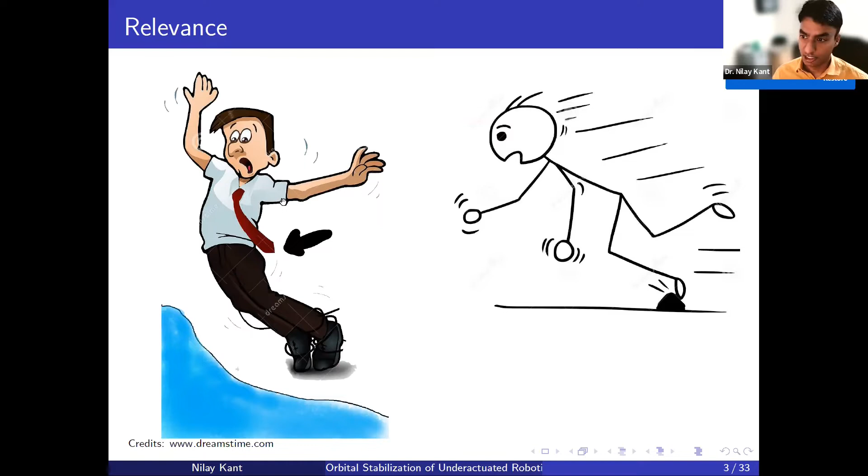You're not aware of a big stone put on the road, and you collide with that stone. Again, your body would try to avoid falling, and in this process it would apply large jerks on the joints so that you do not fall.

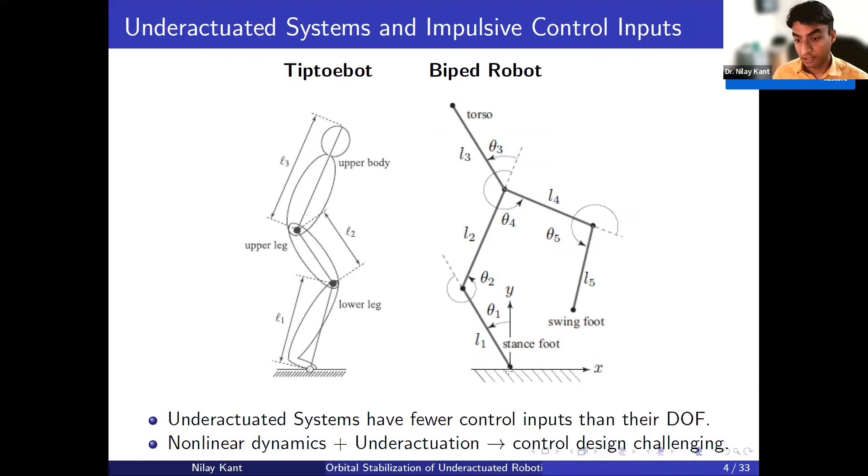For the example of a human standing or a Tiptoebot being stationary, it means that there is an equilibrium configuration. So if you see the upright equilibrium configuration of the Tiptoebot, and if you design a feedback controller to stabilize that equilibrium, it will have a region of attraction, which means that if the states of the Tiptoebot lie within this region, it would converge to the equilibrium.

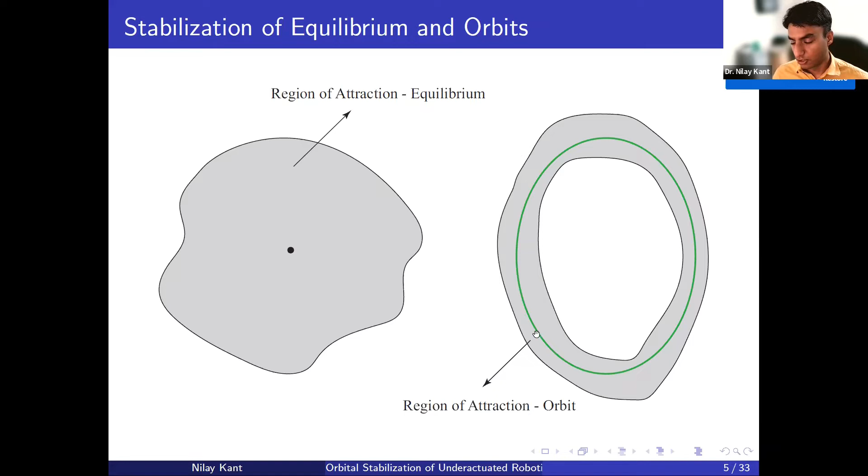Whereas for a biped robot, it's not a stationary configuration, it's a repetitive motion that we want to stabilize. Such motions are represented by an orbit. And similar to an equilibrium point, an orbit will have a region of attraction, which means that if you start within this region, you have a tendency to converge to this repetitive trajectory.

So these are some of the examples. On the left, again, orbit can represent a human walking gait, and an orbit can also represent a gymnast motion. For example, if you have seen gymnasts, they can swing their body and turn upside down. So there is a repetitive trajectory that they try to achieve, and you can represent that using orbits.

So in this particular work, we present a control strategy for orbital stabilization of underactuated systems, and we specifically use a combination of continuous and impulsive inputs.

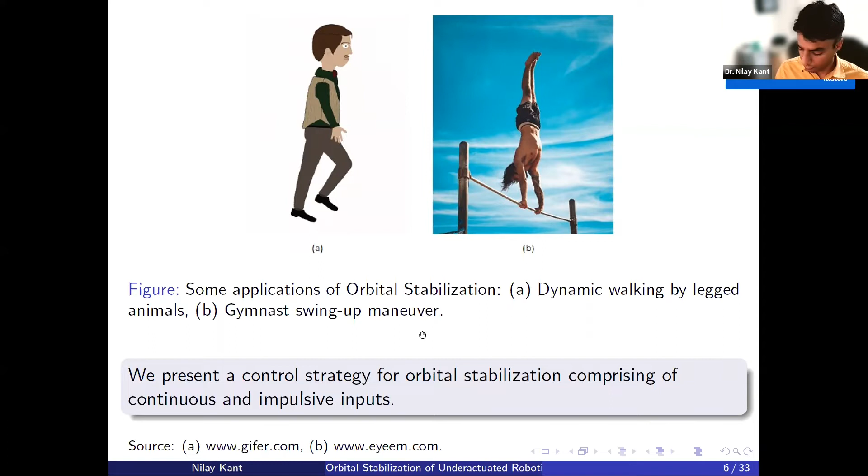So let's see what impulsive inputs are. If I throw a ball on a rigid ground, the ball has a tendency to collide and bounce back. Now, if you closely analyze the interaction of the ball with the ground, you'll see that when the ball makes contact with the ground, it immediately changes its velocity, but there is no change in position. And this is because a very large force acts during the time of collision.

Similarly, if you apply impulsive inputs on an underactuated system using motors or actuators, the joint's velocity would jump, but their position would not change. So that is what we are trying to see over here.

The equation of motion of an underactuated system can be represented in a simple form by this equation over here. You can note that here the control input is U, but the control input is 0 for Q2, which means that Q1 is actively controlled using control input U, but there is no control input to actively control Q2. So let's see what happens if U is impulsive in nature.

What we do is we integrate this equation on both sides for a very short interval of time. So the integral of U is the impulse of the force, right? And you can basically ignore these terms because they do not change in a very short interval of time.

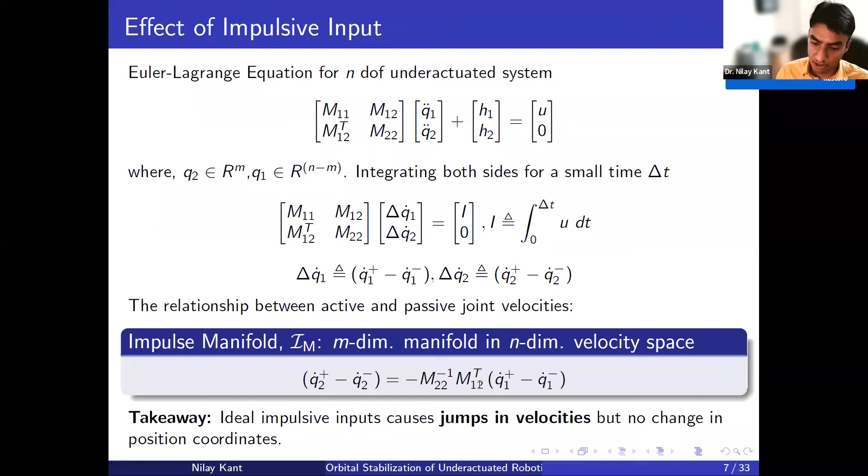So again, to summarize, if the active joint velocity jumps from q1 dot minus to q1 dot plus, the passive joint velocity would also jump, and they are related by this equation. So the takeaway is, if you apply ideal impulsive inputs, it would cause jumps in velocity, but there would be no change in position coordinates.

Now, with this background, we are ready to state our formal problem statement. So if you remember the gymnast problem, we are actually trying to stabilize the orbit for that gymnast. That's what we're trying to quantify here mathematically.

So we assume that we have an underactuated system with a single passive degree of freedom. So if there are n degrees of freedom, there are n minus 1 actively controlled joints and 1 passively controlled joint. Again, the generalized coordinates are denoted by Q1 and Q2, where Q1 is active and Q2 is passive.

So the control objective is to stabilize the orbit defined by this equation. What we want is Q1 to go to 0, Q1 dot to go to 0, and E to converge to E desired, which basically means that if you consider the gymnast problem, the body of the gymnast would remain stationary with respect to each other, but the entire body would oscillate at some desired energy.

That's what we're trying to achieve here. So the total mechanical energy of an underactuated system can be given by this expression, where the first term is the kinetic energy and the second term is the potential energy, and M is the mass matrix of the system.

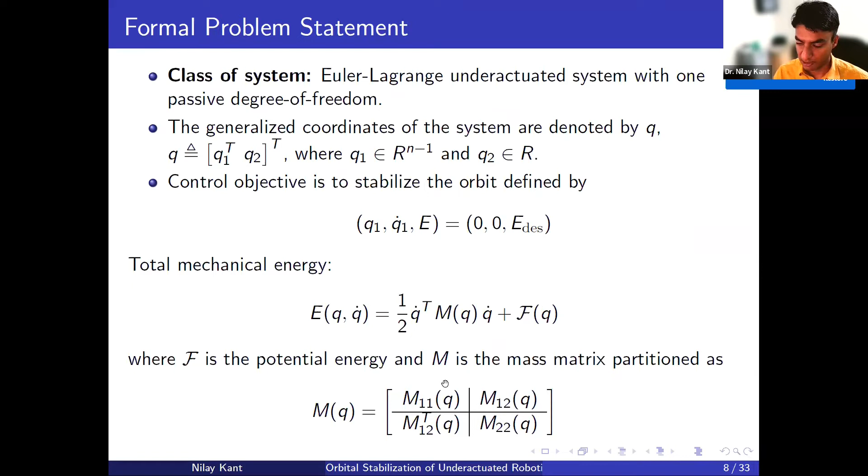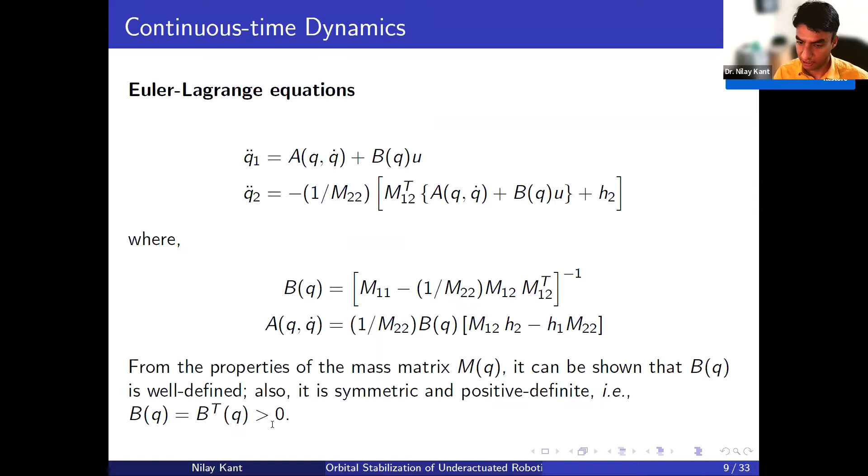So the Euler-Lagrange equation, as we saw earlier, can be expressed in this form, where the matrices B and A are given here. No need to go into the details, but a higher level overview would be good enough to understand. One thing to note here is this matrix B is positive definite. We'll be using this pretty soon.

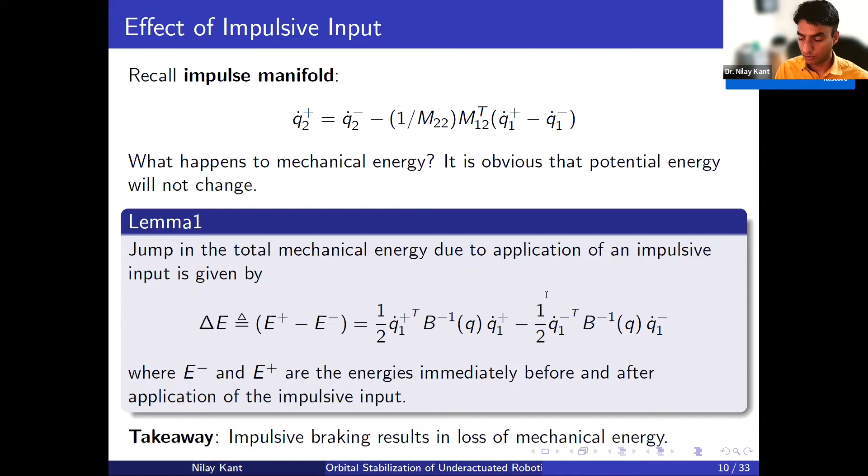Now, if you substitute Q1 dot plus to be 0 over here, you are left with this term. And if you recall, B is positive definite, which means that this entire term is negative. So what this means is whenever you apply an impulsive braking input, the overall energy of the system is lost. So we always lose energy whenever we apply impulsive braking.

Now, let us get back to our problem statement. If you recall, we wanted Q1 to go to 0, Q1 dot to go to 0, and E to converge to E desired. Now let us construct a scalar function given by this expression.

Note that this matrix Kp and Kd is positive definite, and the scalar Ke is positive. So this means that this entire term is positive definite. Now it means that whatever you substitute here, this quantity will either always be positive, or it will be 0 only when Q1 is 0, Q1 dot is 0, and E is equal to E desired.

So in other words, if we can somehow take the value of this function to 0, we have achieved our goal. So let's see what happens when we apply an impulsive braking and what happens to this function. You can show that if you choose this quantity to be positive, and if you apply an impulsive braking input, this quantity will always have a negative change. So you can always cause a decrease in this function's value when you apply an impulsive braking input.

So now this is the main idea of this work. We are trying to combine continuous time inputs as well as impulsive inputs. So what we intend to do is we want to design a continuous controller that can reduce V with time. In other words, V dot should be 0 or less than 0. But this cannot always be achieved because we have an underactuated system.

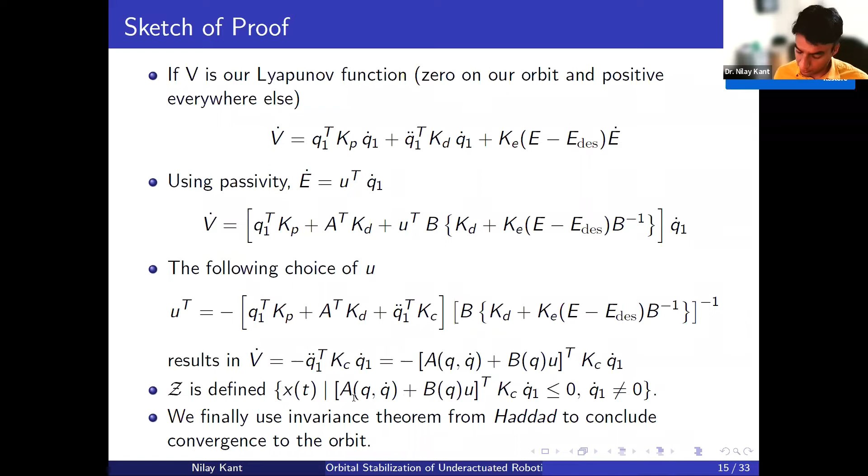If you remember the gymnast problem, you can model this gymnast as a three-link robot with 2 active degrees of freedom, which means that a gymnast can use his shoulder joints or his hip joints to add energy to the system, but he really doesn't have any control authority. That's why this joint is passive.

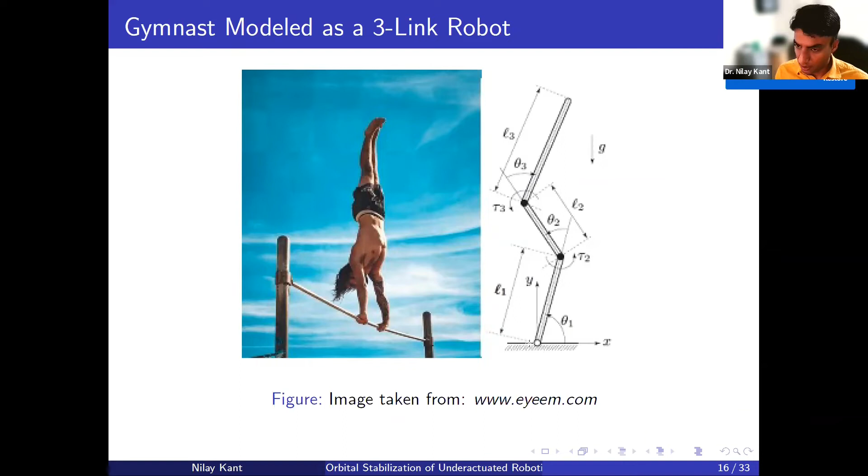Let me show you an experiment that we did.

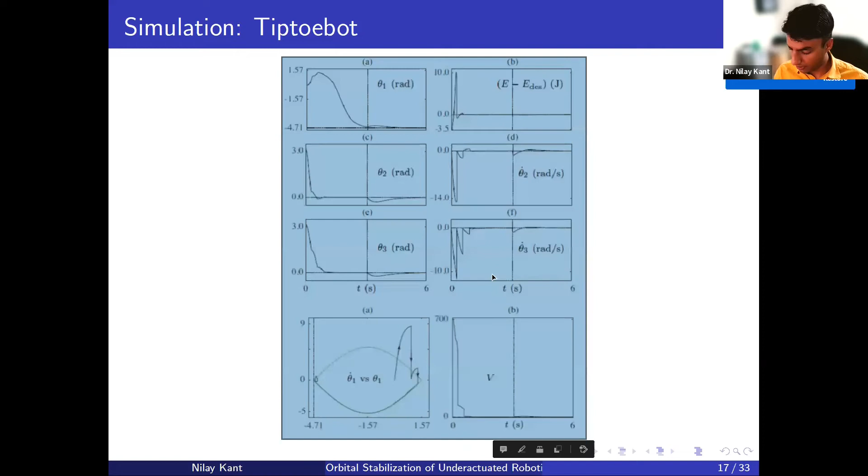On a rotary pendulum. So, do you see my screen? Go ahead, can you confirm? Yes, we can see it.

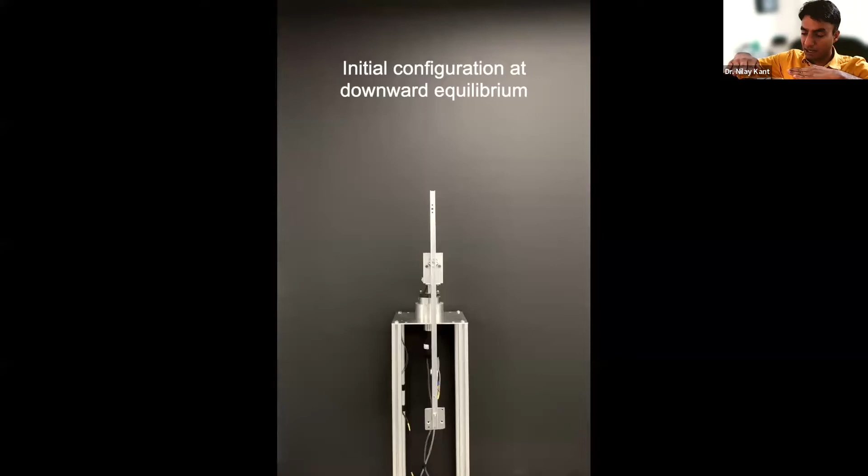Okay, so this is an experiment on a rotary pendulum. Let me pause the video. So this is a rotary pendulum, and there are two links over here. There is a horizontal arm, which you cannot see clearly, and then there is a pendulum attached to this arm. This pendulum has no actuation, so there is no motor — it's a free joint. What you do is, you have just a single motor here, which can control the motion of the horizontal arm, and using that motion you have to control the motion of the pendulum.

What we do is, we have an additional brake here to apply the impulsive braking, and we use a combination of motor and brake to stabilize an orbit. That's what you're going to see here. You'll be hearing some clicking sound, and those sounds are basically when brakes are applied.

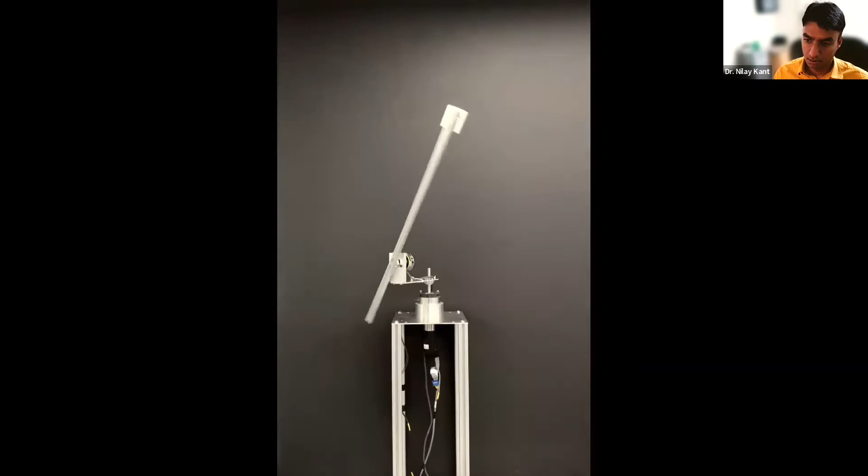Okay, so hopefully that made sense. You can see that by a combination of continuous and impulsive input, we were able to achieve a desired energy.

We are unable to listen to you properly. Your voice is a little low now. After the video, this happened. Is it better now? It has gone too low. Eldo, do you face the same issue? Is it better? It is much better now. Yes, much better. Okay.

Okay, so hopefully that video made sense. So that was the first orbital stabilization strategy that we explored.

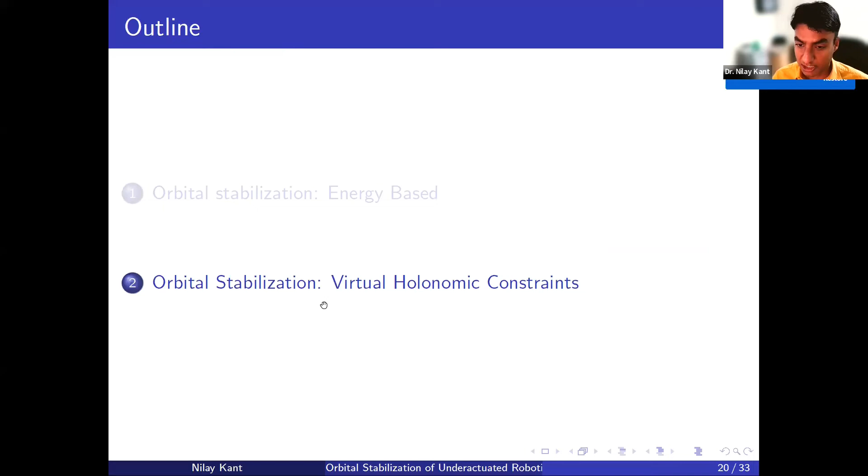So the next strategy is orbital stabilization using virtual holonomic constraints. Again, the motivation is we want to generate a repetitive trajectory, but unlike the last problem where the active joints were stationary, we want orbits where the active joint also moves along with the passive joints. One thing to note is that these virtual holonomic constraints could be used for motion planning, and the advantage is we do not have a timestamp trajectory when we use this methodology.

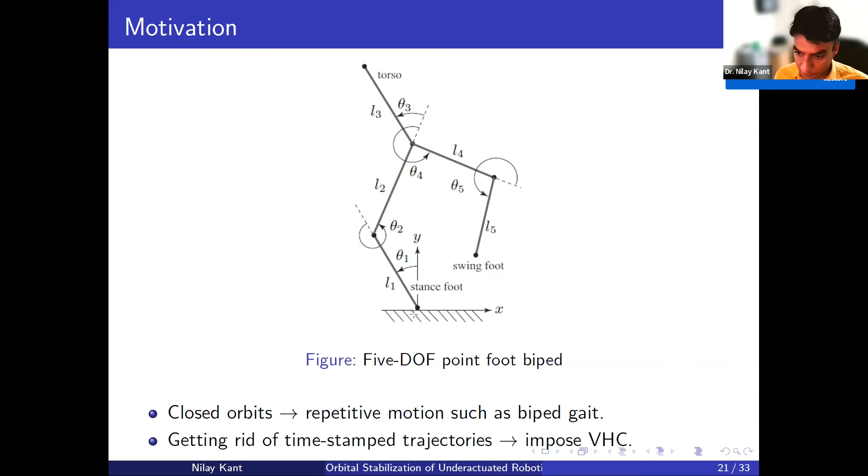So don't worry if you don't know all the details, we'll be getting to that pretty soon. So again, the system dynamics, or the equation of motion, is expressed in this form, where Q1 is the active degree of freedom and Q2 is the passive degree of freedom. One thing to remember is Q2 is scalar, which means we have a single passive degree of freedom here.

So this is my virtual holonomic constraint, which basically says that Q1 is some function phi of Q2. This means we always want the active joint position to be some function of the passive joint position, right? It could be as simple as Q1 equals minus Q2. So if you have a two link pendulum, if this angle is, let's say, 45 degrees, this angle would be minus 45 degrees, and it would always maintain that constraint. So that's simply the virtual holonomic constraint.

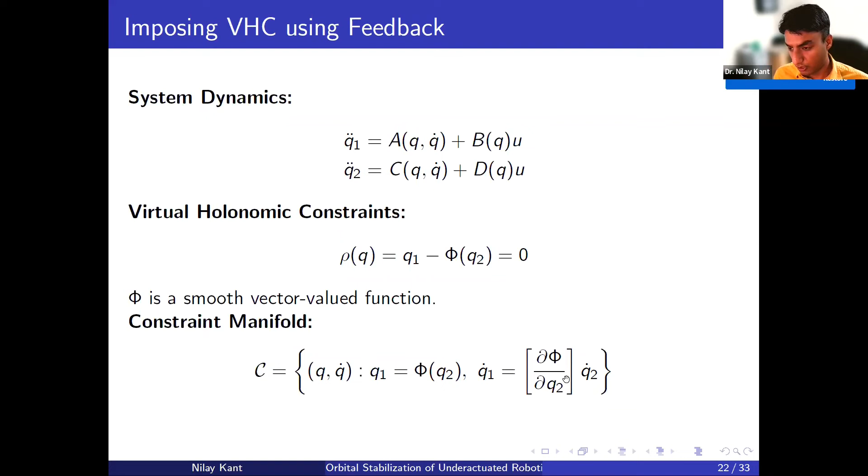Now, what we call a constraint manifold is when we have satisfied this constraint, or always satisfy this constraint, we are on a constraint manifold, which means Q1 equals phi of Q2, and the derivative of Q1 equals the derivative of this term. So if you write the dynamics of rho of Q, you double differentiate that expression, and this is what you get. What we want is for rho to be 0. If rho is 0, it means Q1 equals phi of Q2, and that's what we want to do. So if you write the double derivative of this, you get this expression.

What we're trying to do is feedback linearize the system. So we choose U so that we cancel all these nonlinearities, and then come up with a PD control that can stabilize this. So we choose the gains Kp and Kd such that the residual dynamics is given by this expression, and you can see that if Kd and Kp are positive, rho will converge to 0.

Okay, so now since we can stabilize our constraint manifold, we have utilized all our control inputs, right? But then there is a passive dynamics, a passive degree of freedom which still is not controlled, and we want to see what happens if we substitute this control input. So when you do that, the passive dynamics can be given by this expression, where Q2 double dot is alpha 1 plus alpha 2 Q2 dot squared.

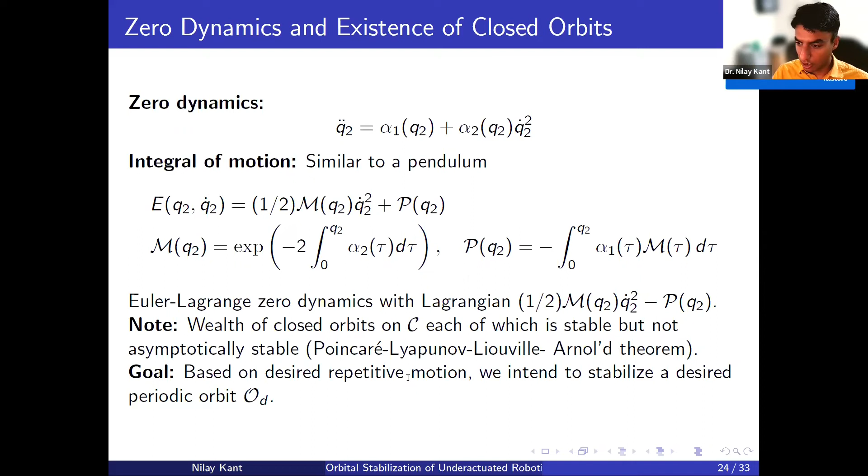So there is no tendency for the trajectories to converge back to the orbit. What we want to do is select a particular orbit and also asymptotically stabilize it. Let's call our desired orbit OD. Now, for this, we construct a Poincaré map.

This theorem says that if we are on this orbit, we would continue to trace it. But if we drift away, we would not come back. So instead of looking at this entire orbit, what we do is construct a section, which we call a Poincaré section.

You can imagine that this section would intersect this orbit at a single point, and we call this the fixed point of this orbit. So if you are on this orbit, in one period you would always intersect this point again and again. Now let's say this point was attractive.

This means that if you start from away, the intersection point would slowly approach this point. In other words, the stability of this orbit can be investigated by simply looking at the stability of this particular point. Some of you would have guessed it right.

You can represent this map using a discrete time system, and this is called a Poincaré map.

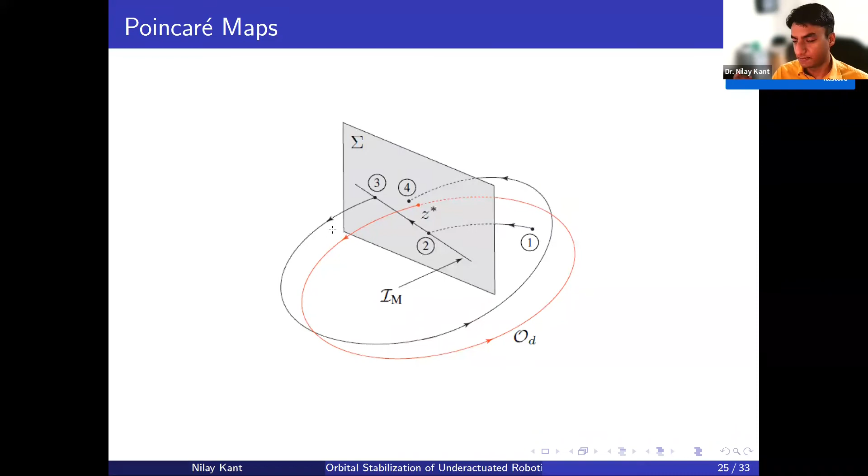So what we do is we construct a Poincaré section where the passive joint angle is constant, and the Poincaré map is given by this expression. One thing to note is, since we have fixed Q2 over here, we have one state less. We have 2n-1 states of the Poincaré section, and we denote this by Z.

Now, if you substitute Z star, which is the fixed point of this map, you will return back to Z star. So this map will say that if you start from Z star, you'll reach back to Z star, and that's the fixed point.

Now, if you linearize this map about the fixed point and compute the error between where you are versus the fixed point, you get this particular expression, where E is the error between Z and Z star. And the stability of this map, as we saw, can be investigated by looking at the stability of this discrete system.

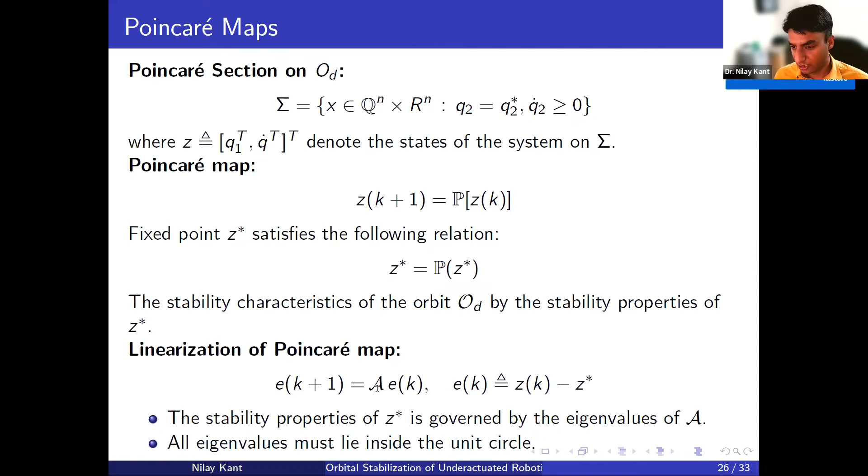Since we know that these orbits are not asymptotically stable, the eigenvalues of this matrix would not lie within the unit circle. So we need some mechanism to push the eigenvalues within the unit circle.

And what we use is we leverage impulsive inputs. So what we do is we say that whenever we are crossing the Poincaré section, we'll apply an impulsive input, and that would drift the trajectory.

And then maybe in the next intersection, we would come closer to the fixed point. So that is what we're trying to do. Our control input is the impulse I that this impulsive input imparts to the system. Now if you look at this Poincaré map with this new input Ik, this is how you can represent the system.

And what we do is we linearize this map about the fixed point and about the nominal impulsive input, and you get a linear discrete time system. These matrices can be computed numerically.

So this is the main result. It says that if the pair AB is stabilizable, the orbit OD can be stabilized using discrete impulsive feedback given by this expression. And what we are trying to do is, let's say you start from a point 1 and the trajectory intersects this Poincaré section at point 2.

So this is not Z star, and we would never reach Z star because we need to do something. So what we do is we apply an impulsive input. This moves the state of the system on this Poincaré section, and then we rely on the continuous controller.

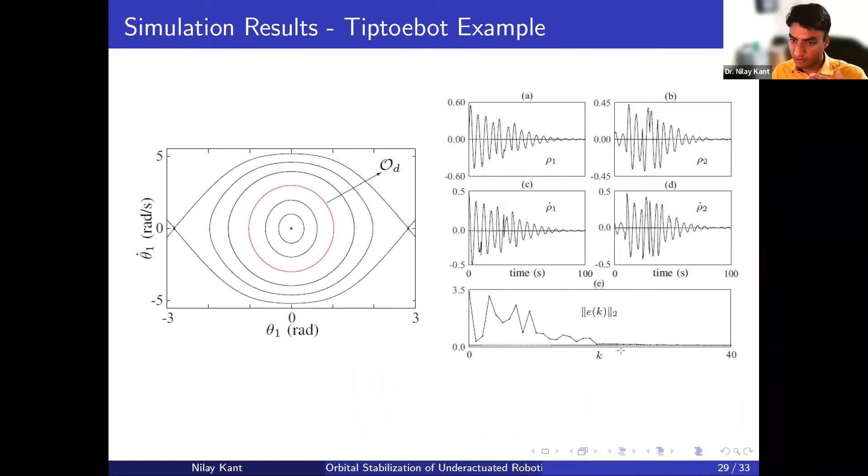So this brings us to the end of our presentation. Let's see what we saw today.

We saw a general result for orbital stabilization for a class of systems. Note that in regards to previous works, where people look at one system and analyze the stability and design controllers separately, we presented a generalized methodology which can target a class of underactuated systems. The generality of the method was shown using simulations on a 3 DOF system as well as experiments.

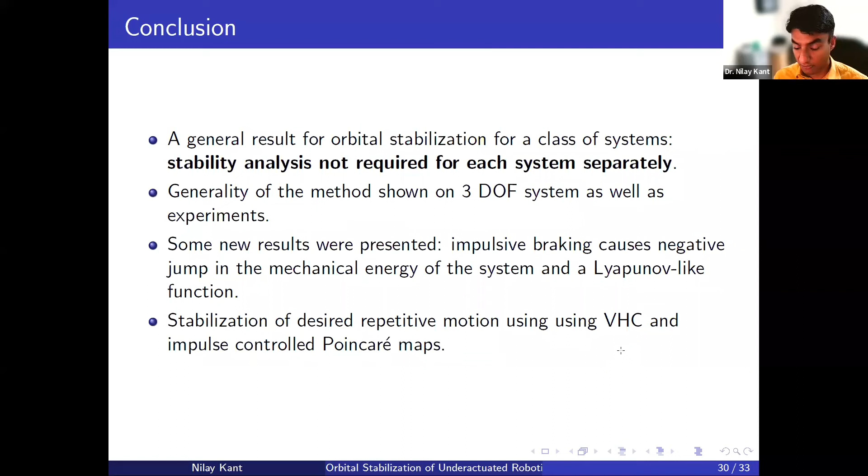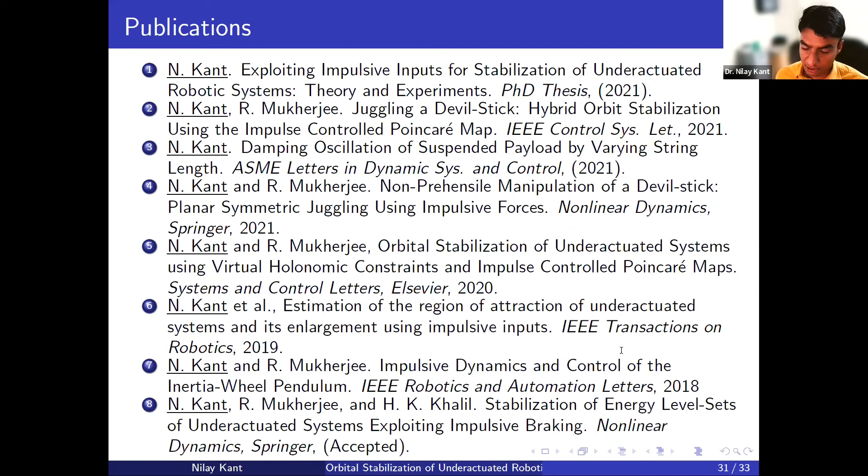Some new results were presented, such as impulsive braking causing a negative jump in the energy of the system and the Lyapunov-like function. And finally, we saw that stabilization of the desired repetitive motion can be achieved using the VHC approach, where we again use a combination of continuous and impulsive inputs. These are some of the publications for this work, as well as some of the other works we did in regards to impulsive inputs.

Thank you so much for listening, and I would be happy to answer any questions you have.

Thank you. It was a wonderful presentation. It's far away from my expertise, but I'm still really curious about the work you have done. In fact, I never seen experiments like the pendulum work you have done. I'm just curious, so you developed this particular control system and implemented that system into the pendulum.

Yes, that's correct. So you said you applied a braking, like once it reaches the top? Not on the top of it. So the braking is applied intermittently. We have the motors applying torques continuously, and intermittently, based on a control logic, we brake the joints, and that's based on a condition.

And what it does is that the combination of the continuous inputs we apply and the braking makes us converge to the desired energy level set. Does that make sense to you? Got you, okay, that makes sense.

So now you're telling me there is this Poincaré map, and it has been said that once it is outside its trajectory, it is difficult to bring it back to its original orbit, and you use the other methodology to bring it back. Okay, so even if you go outside the trajectory, now your system can take it back.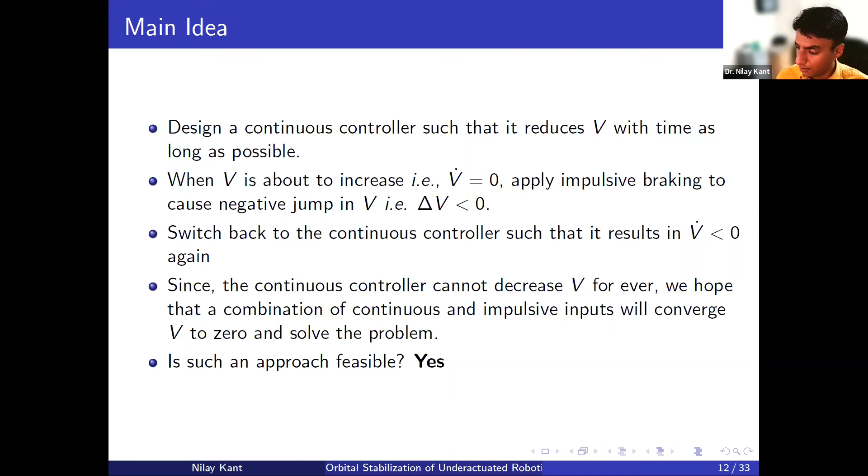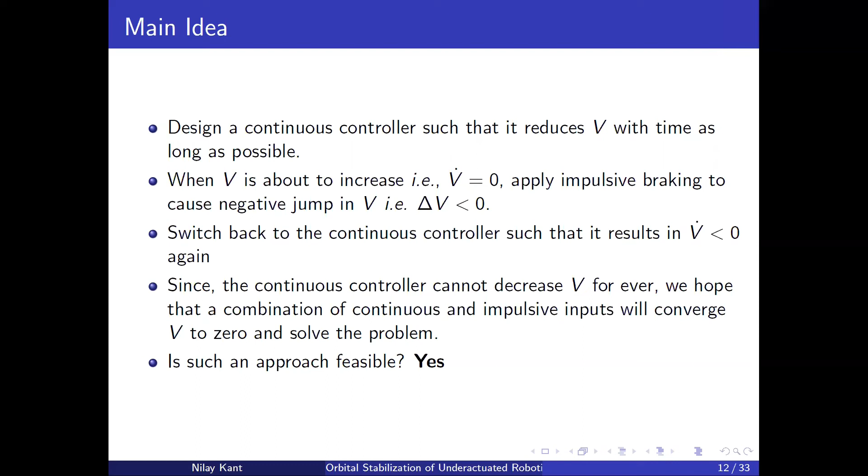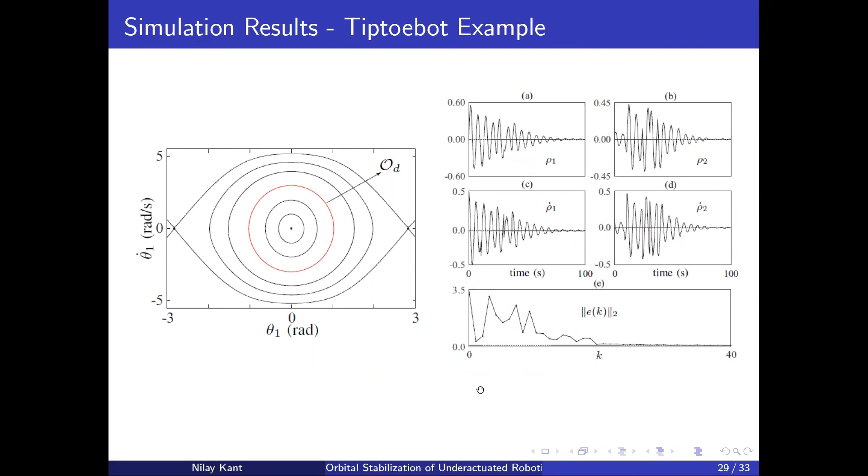Regarding slide 29, I believe, the slide you mentioned, slide 20... yes, yes, you mentioned this mechanism, yeah. You mentioned linearization around the operating point Z star, right? And to apply this particular mechanism, you mentioned another operating point, or another point.

I believe point number 4... no, that's not it. I think you didn't understand exactly what I was saying. We do not have different operating points, we just have one operating point, which is Z star, right? Not this operating point, it is another point. Another point, I think in slide 27, yeah. So you mentioned Z star, this is the operating point, and you mentioned another point for applying this mechanism.

Right, okay, yeah, okay. Complete your question, I will answer. Yeah, this is my question: can you clarify about the other points used to apply this particular mechanism?

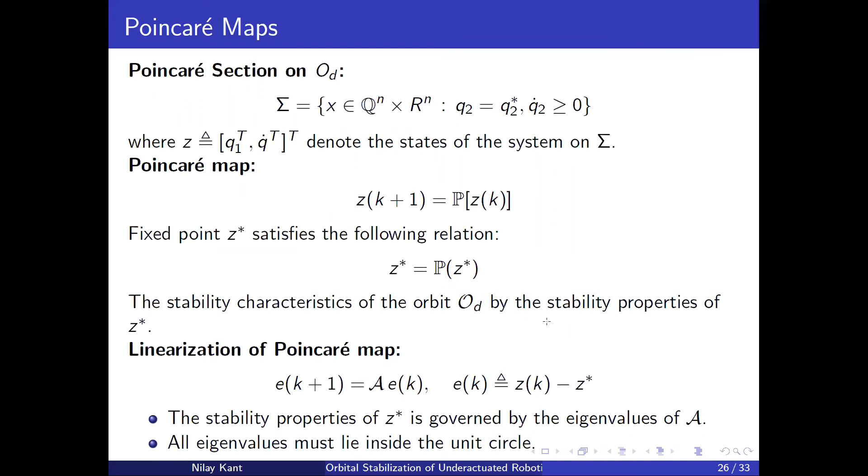Okay, let me clarify what I said. We have an orbit, right? And if you construct a section of this orbit, that section will intersect the orbit at a single point, right? So the idea is that we want to converge to this point.

So how do we do that? What we do is, let's say you start at a different point, right, and you have a continuous controller. This continuous controller would do whatever it wants to do, but it would not take it back to this red trajectory. So the trajectories would intersect at some other place on this section, right? And if you don't do anything, you would never converge back to this point.

So what we do is we have a discrete controller that applies an impulsive input whenever you intersect this section. We show that this discrete controller has a tendency to bring this point towards that point, but it would not do it immediately. So what you do is shift the point, because when you apply an impulsive input there is a discontinuous change in the velocity, right? So when you apply an impulsive input at point number 2, the trajectory jumps to point number 3.

And then you switch back to your continuous controller, and you wait. So this trajectory again intersects this section at some other point, called point 4, right? And if you keep repeating this process, you will see that this intersection point will start to approach Z star. This is what we're trying to do here. Does that answer your question?

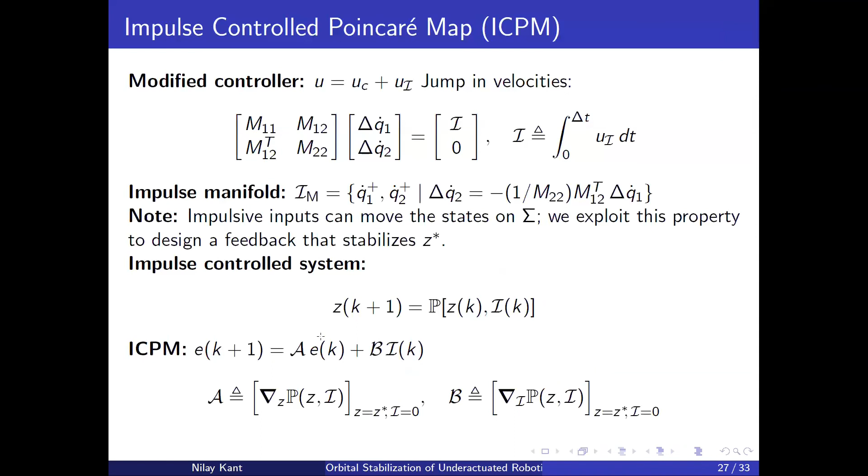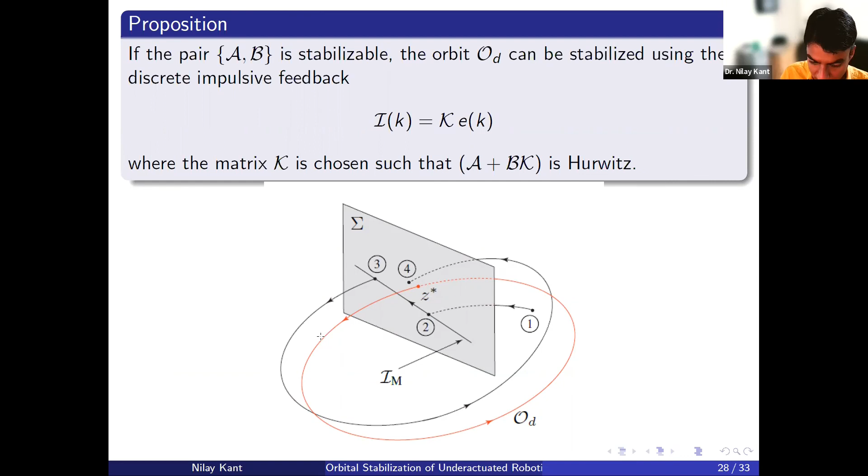I'm sorry, another question if you don't mind. I'm sorry I came late, but you explained a PID controller for the inverted pendulum at the beginning of this presentation. It was not a PID controller, it was a nonlinear controller. Can you talk briefly about it? What I saw was KP, KI, KD, right?

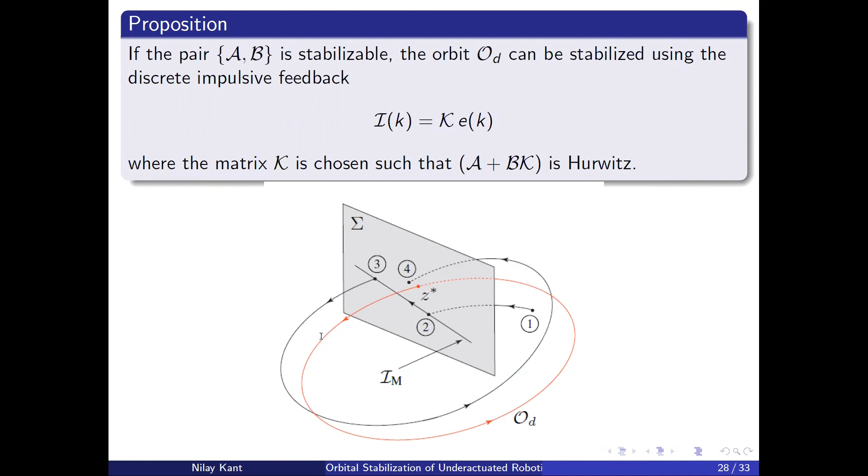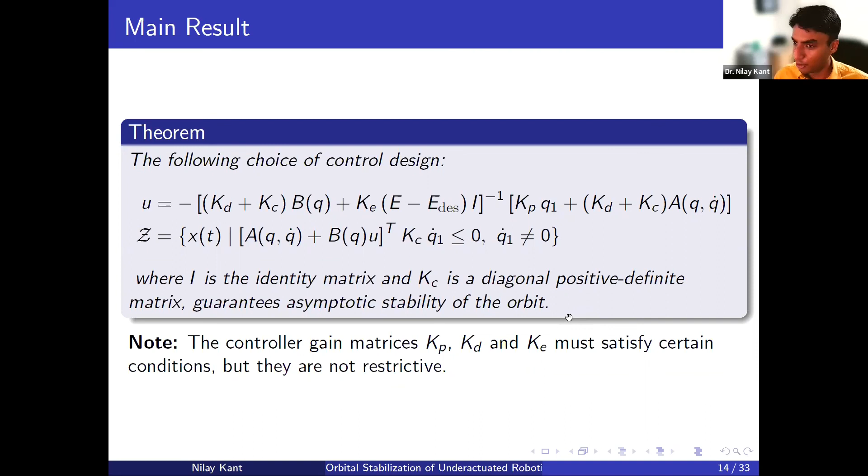Okay, alright, thank you everyone, it was great to talk to you. Thank you, see you later, hopefully in the future. Yes, see you, thank you so much, Dr. Nilay, thank you, thank you. Bye.